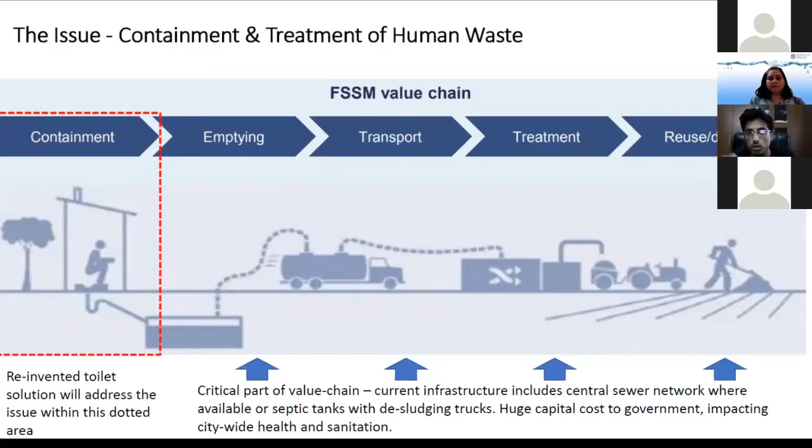So there are multiple technology partners that have developed these solutions, and they have licensed them to a few commercial partners in India and elsewhere. And we are working with them as we are building the market. We have about 3 pilot systems with the larger centralized FSTP; our solution is called the Omni Processor. So I will cover that briefly. But yeah, this talks about the MERT.

Sorry, 2 slides before. Previous one.

Yeah, thanks. So this essentially talks about the value proposition of the MERT in a nutshell. Everything, in situ containment and treatment, happens. We have a few technologies on offer as far as the multi-user reinvented toilet, or the MERT, is concerned. We have companies offering this as a product in the country, and we are working with a few of our channel partners to make an outreach into the market and make sure these can be proliferated over time.

Please stop me if there are any questions, but I'll just keep progressing over the next slides. Next slide, please.

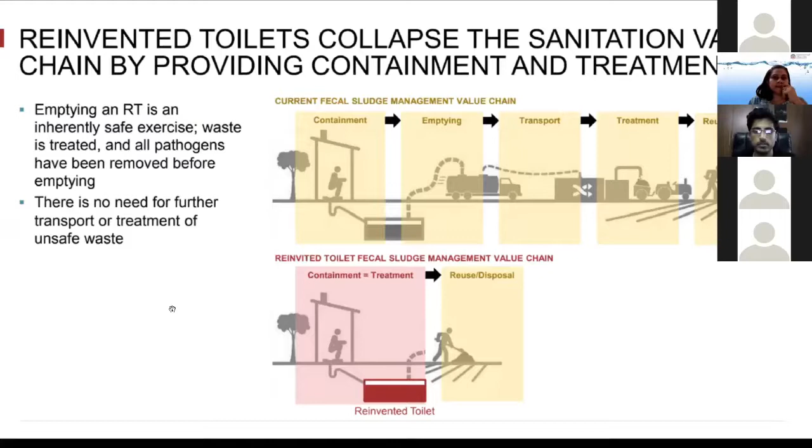Yeah, I think these probably we are all aware of in terms of how much.

No, I just have an observation to make, Venkat, with regards to this mobile treatment system. So the one that was, I think, on display during the Beijing exhibition, we were told that the current technology can treat only if the extent of solids is about 1 to 3%.

But I think the desludging characteristics in India, the composition is such that the solid content is varying from about 6% to sometimes even 12%. So that was an observation, and perhaps we are looking at having more technologies which are more suited to the Indian context as well.

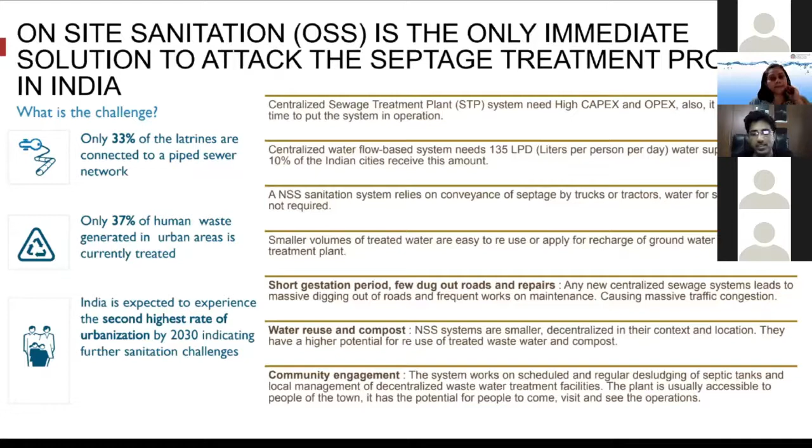Absolutely, and we actually have one of our partners, Washai, who have developed a mobile treatment unit which has undergone continuous improvement, as you rightfully observed. So I think that has reached a stage where this really can take higher concentration of solids than what was seen back in 2018. I think that has been addressed to a great extent, but that's a very valid point that we need to be suitable to what you experience in the Indian context. Thank you. Yeah, please, next slide.

Sorry. I mean, we spoke about this. So basically, you get to conserve water on site. This puts less stress on the city or the urban localities' sanitation system. Whether you're sewered or, especially if you're non-sewered, then you really don't have much of a load that comes on in terms of the STP.

You have a lot of treatment happening in multiple facilities, where feasible within the facility itself, so that they are pretty much self-sufficient as far as treating their waste is concerned, which is a huge positive, leapfrogging many of the solutions that conventional systems might not be able to offer, because you need to have desludging, you need to take it to a centralized location and then treat it and then get it disposed of and so on. Next slide, please.

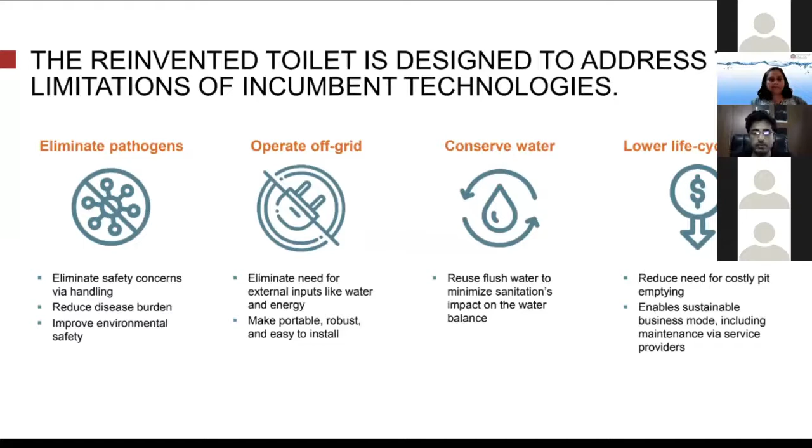So like I said, over the past 10 years, multiple technology pioneers have participated in the challenge, have been able to put forth an idea that has been bettered by the foundation experts and then taken to the next stage, developed and brought to a stage where they can be commercialized. So a lot of work has been done in the last few years. And it's all culminated in a product that can really be implemented in the field today. And that's where we are as we speak.

And we are really looking to develop this further, refine this further, of course, with a very clear understanding that at the end of the day, it has to be commercially feasible. So the value engineering, localization for the Indian context, cost optimization efforts are underway, and we're trying to build the first few systems so that we can travel along the cost curve and get it to the physics-limited, scale-driven costing, which is what we call the should cost. So that is the effort we are in.

But as a system, these have been proven to work in the field as well as in live settings where actual people generate waste and that is being treated. Next slide, please.

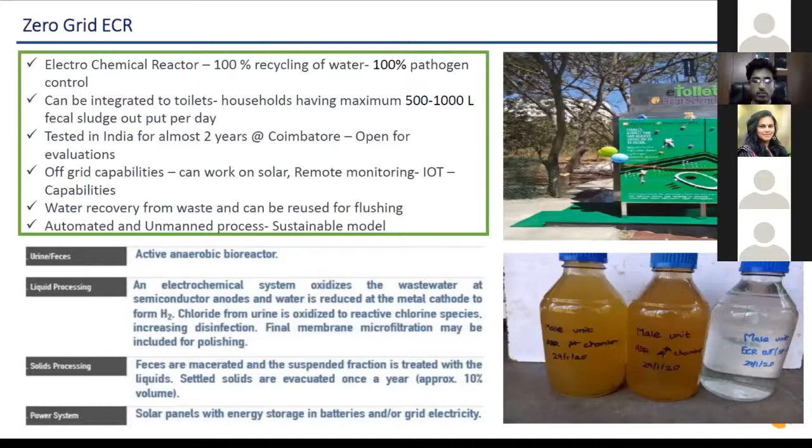And this just gives you an image of how it looks. So as you can see, there are multiple ways to set this up, but these are containerized solutions. So we can actually move these around. For example, you have a school that needs this, and then for some reason, for 6 months, as the pandemic showed us, schools are shut for some time. You want this to be used elsewhere. This can be transported as a treatment unit. Again, these are smaller treatment units. When you set up a much larger one, probably it has to be sitting where it's actually being used.

It gives you the option of going with very small systems, akin to distributed energy systems. You could have a very small solar system or a large solar system on your roof - it's similar to that. This can be transported and it's very flexible in terms of how you want to utilize it. The installation is very simple, pretty much made in the factory and brought there with very little civil work needed to set up the system.

I think we can skip this, it gets into some detail for those interested. Happy to share these slides. It can go from 5000 KLD to 25000 KLD - sorry about those numbers. It has been done in a school in Kerala and it's been working really well. We are actually looking to expand this into a few schools in Gujarat as well, based on what they've seen.

Coming to cost, since I see a question on cost, I want to address that. As of now we still don't have scale-driven costing for these, but you'd be expecting a premium of 30% or so compared to conventional systems, like aerobic systems you see in most applications. The cost factor is getting stabilized, and as we hit close to 500 units or so, we expect to see a much better cost. I can share those numbers - it's a premium of 30 to 40% compared to conventional systems as of now.

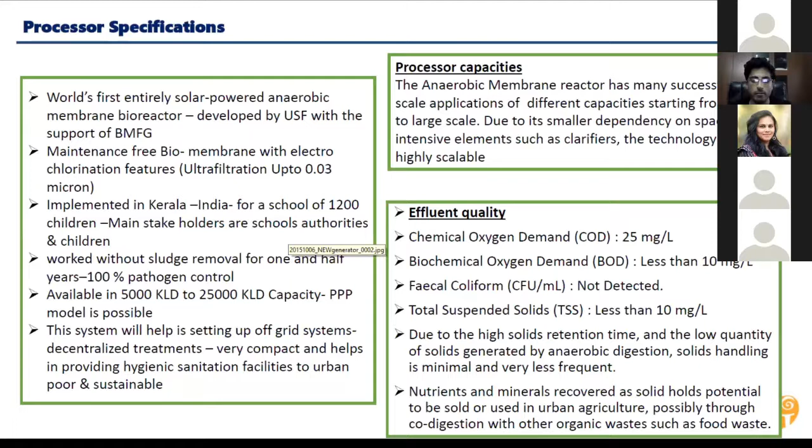Before I go there, I see a question from Dr. Patel. Yes, it can be retrofitted to any existing system because it's just a back-end treatment unit. I don't see a challenge in terms of how it can be retrofitted, because the containment itself can be a holding tank or so, but the back-end treatment is what we offer as part of the RT.

I think Mr. Majumdar has his hand up.

Yes, thank you, Venkatesh, I just have a query. I was fortunate to attend the Reinvent the Toilet Challenge organized at Hyatt Regency Hotel in 2014, and I saw some of the models initially developed there. One query I had then, and still have now six years down the line - I wonder if you've ever been to West Bengal and seen the arsenic treatment units dotted around the rural landscape. West Bengal has more than 5,000 arsenic removal units because of arsenic affected areas. These are all high-end technologies brought in from Europe and the US, put into place in West Bengal, given to the panchayats, and after 1 year of functioning, I think every one of them is defective. The problem is the disposal of arsenic concentrates and residues, how it's affecting groundwater, operation and maintenance issues.

There needs to be a long-term plan, because it can't be changed every 3 to 4 years by the administrators. We need to understand the network, the open nalas network, and know the plan for going to underground drainage or an FSTP model or whatever it may be. Accordingly, we need to create a framework.

The data about manual deaths, nobody can deny it. India loses one man cleaning a sewer every 5 days. This is an absolute fact - you can see it on the website of NSKFDC.

Talking about machines, there's a conventional belief that we've imported the design or thought from Europe, where water is available in plenty. So we've gone into this model called jetting, where you need drinking water to clean a sewer line, which is perhaps an expensive luxury for India, especially for smaller towns where water is difficult to get, unless you're in Bengal or Calcutta, where you dig the ground and water pops up.

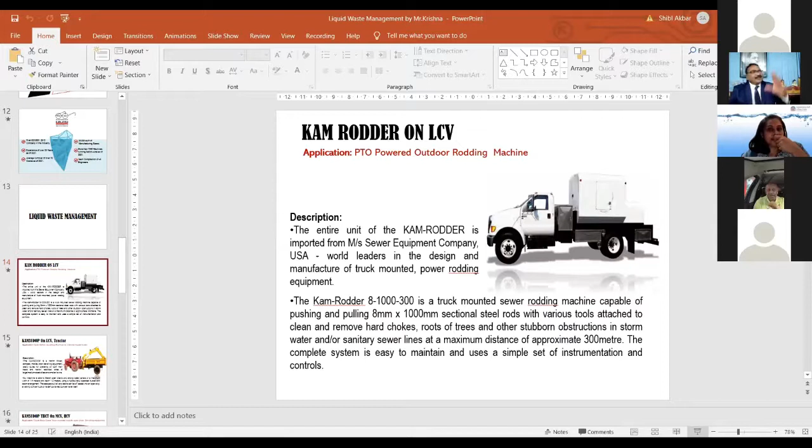If you want to really do drain cleaning, there are two types. One is you clean a choke which has got blocked, and the second is you remove the silt inside the sewer line, which is called jetting. If you can confine jetting to a preventive maintenance program for removing silt, that's ideal. And if you can use rodding to break chokes, that's very cost effective - that's the machine we've given Delhi Jal Board. You can take the machine into a gully, and if there's a choke, put down a rodding machine and completely de-choke a sewer line with no use of water. If you want to de-silt the line, then you use water.

Today we can produce jetting machines which can use recycled water. These jetting pumps were earlier not forgiving, but now we have technology which can use even recycled water. So if any of you have jetting machines which use drinking water, we can upgrade them to work with wastewater, which is of course treated, with all physical impurities removed.

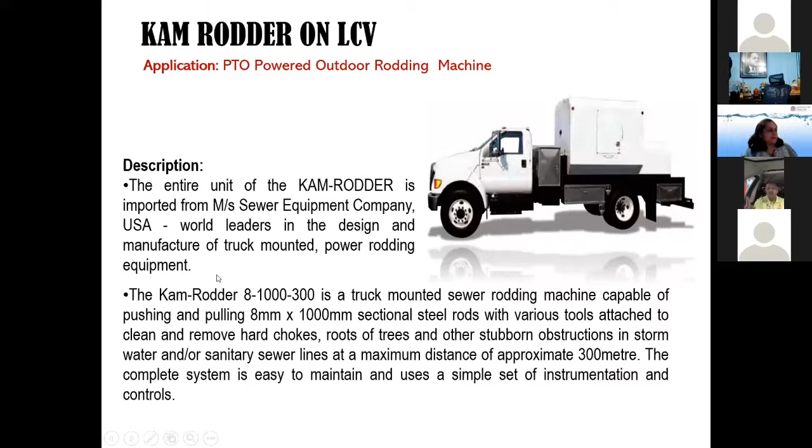There are also small cities which have open drains, so these are machines for open nala cleaning. They de-silt the nala and remove the silt so that the hydraulic load capacity is maintained and the flow is maintained. These are a simple mechanical device for removing silt from an open nala.

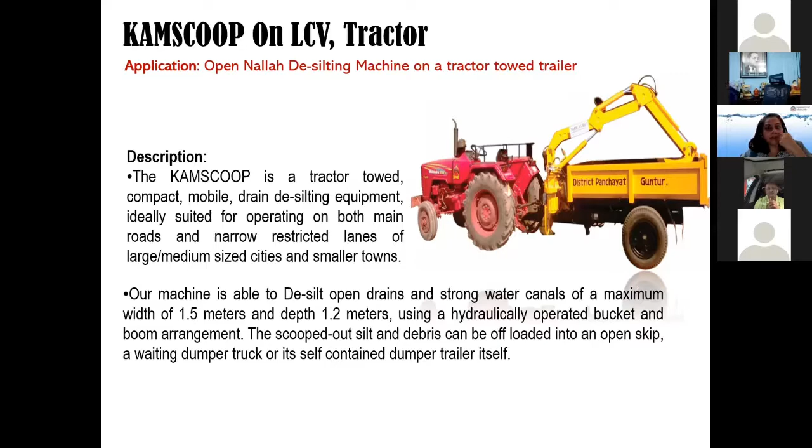We've also seen large drains in big cities like Pune or Delhi - these drains are almost like a kind of river. Now you can't go into these drains and remove the silt out easily, so we have an equipment called a crane, which can go up to about 20 odd meters and pick up silt from the bed of these nalas. This is typically called a tipper body crane truck with a clamshell bucket for cleaning main open nalas, because when the nalas get blocked, there's a back pressure and the sewers get blocked.

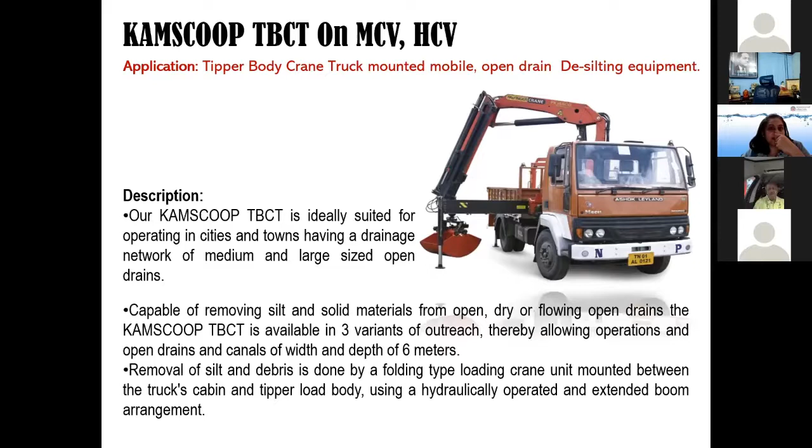There's a smaller machine for cleaning septic tanks, which is now getting more and more popular with the popularized version of the FSTP. Septic tanks are ideal to be cleaned by these machines, with no human contact. You can suck the sludge out, blow back the sludge, homogenize the slurry, and then transport the entire thing without any contact with the human being. So this is a very popular machine for septic tank cleaning.

This is also now made on small chassis for narrow lanes. We have sold them in hundreds to Orissa and many places. Very popular machine for emptying septic tanks. The advantage is the length you can convey is almost 100 meters, not depth—depth is only about 20 odd meters. But the conveyance length is almost 100 meters, because typically septic tanks are behind the house, in difficult to access areas. These machines have a powerful enough pump which can pick up material from a septic tank almost 100 meters away.

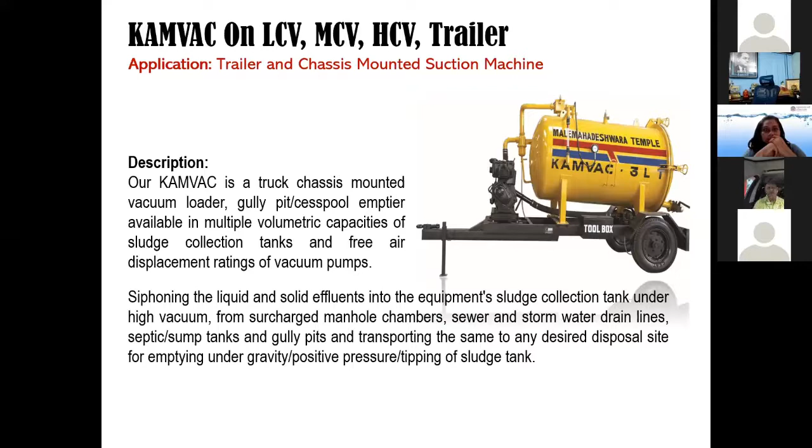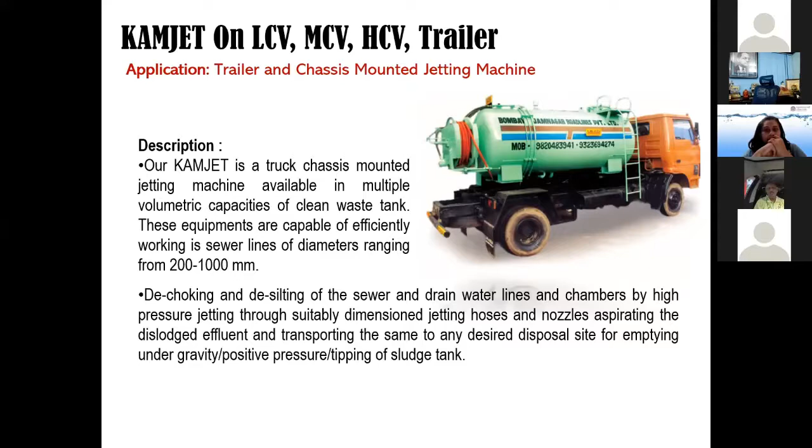These are conventional jetting machines, typically used for de-choking and de-silting sewer lines. They are built on trucks using the power of the truck itself, and use a PTO to drive all the units like a jetting pump or a hydraulic pump. They're extremely mobile and portable, so they can go from place to place using fresh water for jetting.

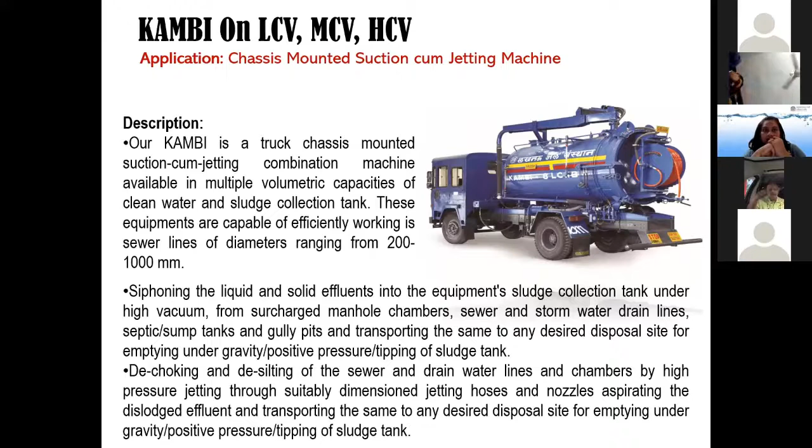These are slightly larger machines, suction cum jetting machines. Half the tank is for suction, the other half is for jetting. It can do both, suction as well as jetting. Typically, it can empty your manhole, and they are surcharged so that we're able to access the sewer line for inserting the hose.

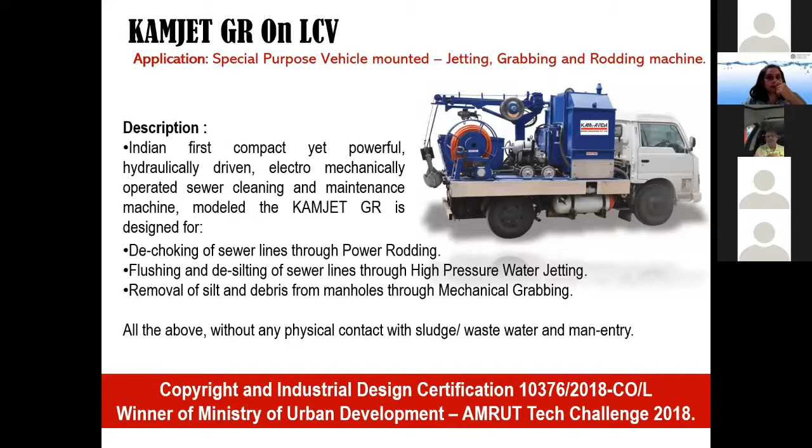This is the machine that we made specifically for Delhi Jal Board. We were lucky to work with the Jal Board officials to design this machine, which got us the award from the Prime Minister's Office for innovation. It's a mechanical grab which can enable you to empty a charged sewer, a charged manhole, and remove the silt and pick it up mechanically. Then you can do either rodding or jetting to keep the sewer line flowing.

They are the same version with larger tanks and smaller tanks, multiple sizes depending on whether the sewer line is in the main road, so we can have a larger tank. If it's in a gully, then we have to have a smaller tank. These are all multiple combinations.

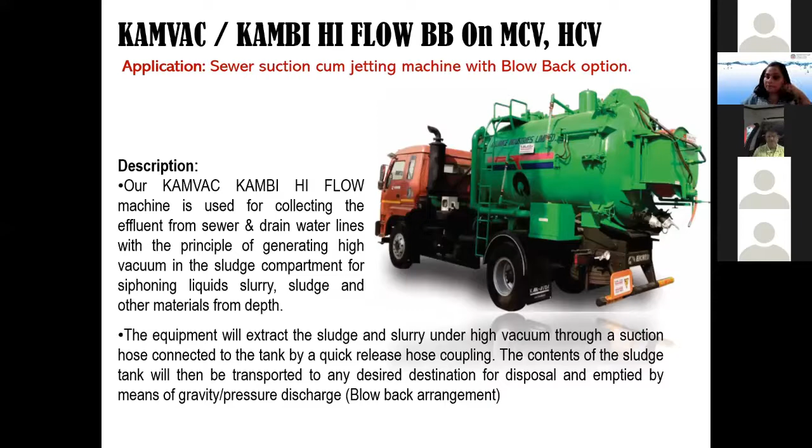Basically, the biggest problem in sewers is the silt. When silt forms inside, the load carrying capacity of the sewerage network starts reducing, and that's when choking happens. In most foreign countries, they don't do de-choking ever because lines don't get choked—they do desilting periodically to avoid chokes from being formed. Whereas in India, we still use machines for de-choking sewer lines, meaning we're saying a sewer line will choke and we'll try and break the choke. The premise itself is wrong. Going further, the ULB must come up with an action plan to avoid choking itself, and that can be done by periodic cleaning or desilting.

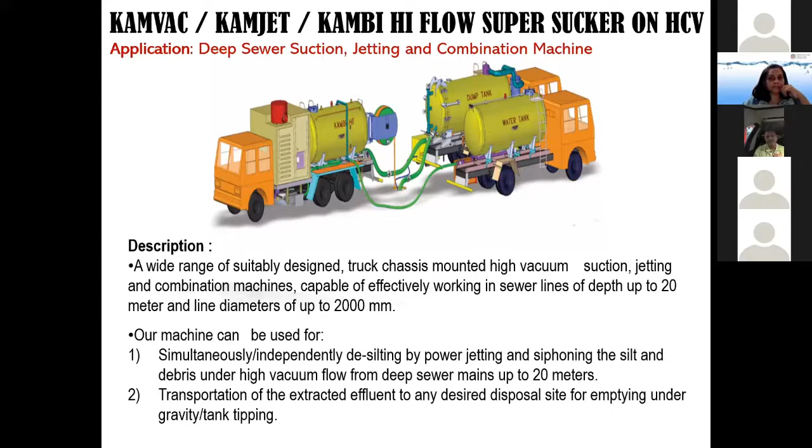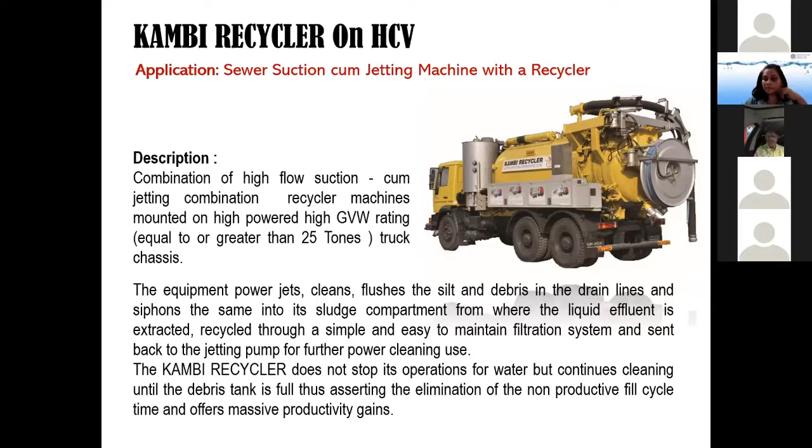So you can stand in a particular place and do desilting for almost 4 to 5 hours. Failing which, in the old method, either the freshwater tank will get empty or the wastewater tank will get filled up. So you stop work and go to either refill or empty. Whereas in this kind of machine, you can work for longer durations. So you save on operating costs, you save on fuel, you save on water. And this is the technology going forward for cleaning large sewer lines.